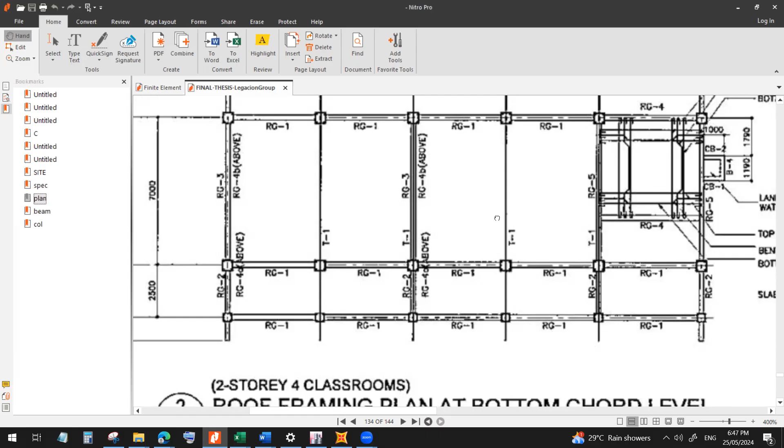Okay, so we will try to model this Tepet school building that I showed you last time in the pushover analysis. Although I have a SAP 2000 model, I'll just show you how to model using SAP, so you'll have an idea.

So for example, the model I made is this one: 1, 2, 3, 4, 5, 6, 4.5. This is our plan view. Okay. 2, 3, 4, 5, 6. Then we set that this is C1, this is C2, and this is C3. So the distances are 4.5. For example, let's just fix it at 4.5, to make it quick. 4.5. Then this is 7 and 2.5.

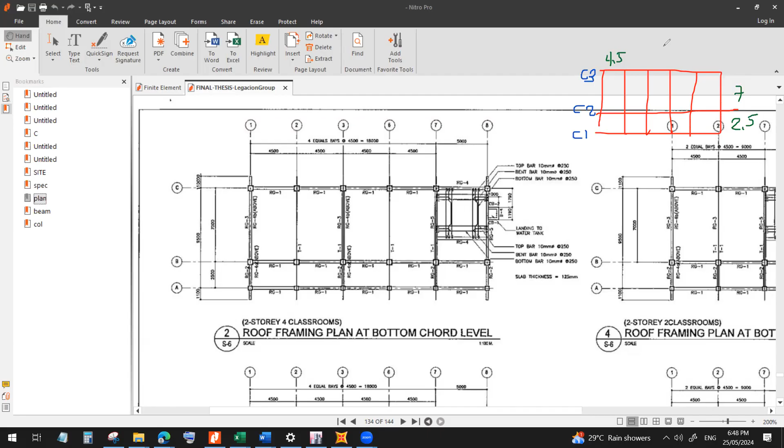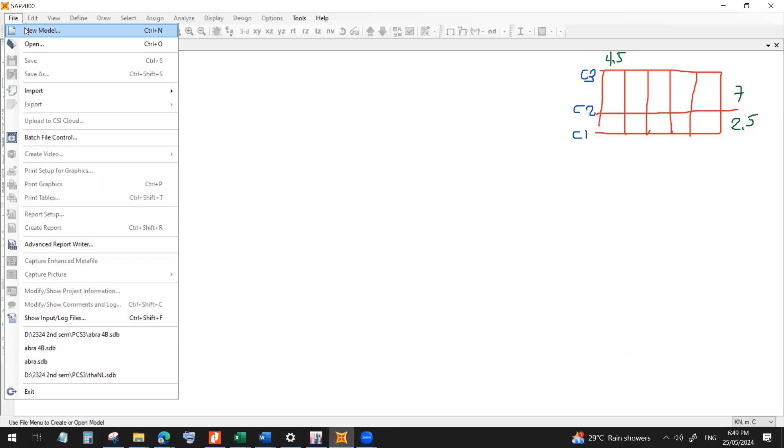Let's go to SAP. And again, make sure the units are consistent. We have kilonewton and meter. Go to file, new model. You can use grid only, to make it quick. It will ask you how many grids in X direction, how many grids in Y, and Z. So this is X, and I think this is Y. In X, we have 1, 2, 3, 4, 5, 6. Then in Y, we have 3. And then Z, since it's only 2-story, just three.

Right? Now, spacing. Let's try 4.5. For Y, let's try 7. We'll edit later on. And then Z, 3. This is for the elevation. Okay, then click OK. Is that right? Remember it's 7. So we'll edit it here.

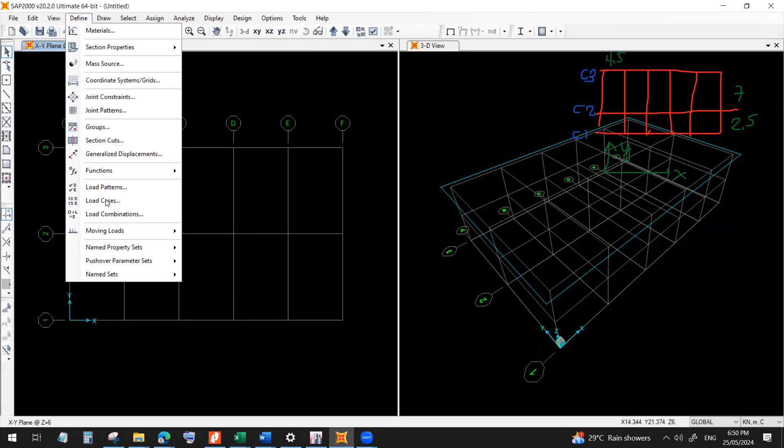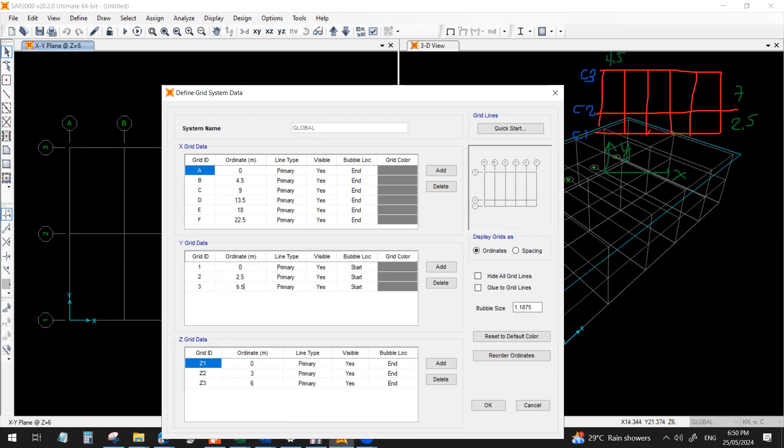Define, coordinate systems and grids. Modify. So grid 1 is 0. Grid 2 will be 2.5. 2.5 plus 7 is 9.5. Then if you want to edit the last one, since the last bay is 5 meters in the actual, you can edit it here. Click OK. Click OK. That's it. Then, as I said, you can just use a single column, single beam.

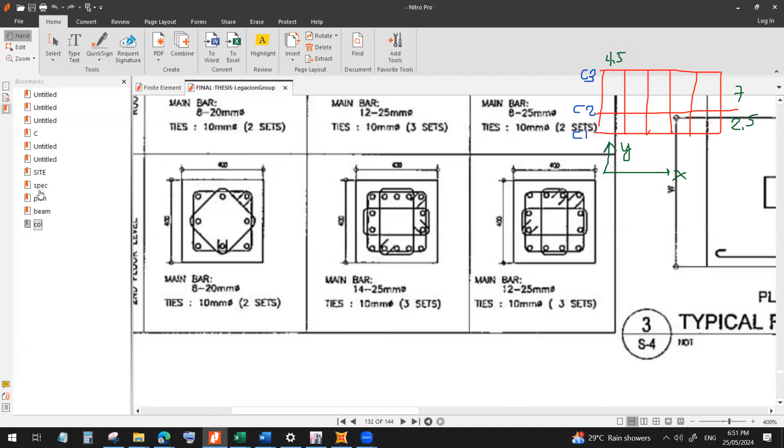Let's model the column. We'll model the 400 by 400, with 14 bars, 25 mm. So, define. Wait, materials first. Because if you look at the specs, the concrete is only 21 megapascal, and the rebar is only 280.

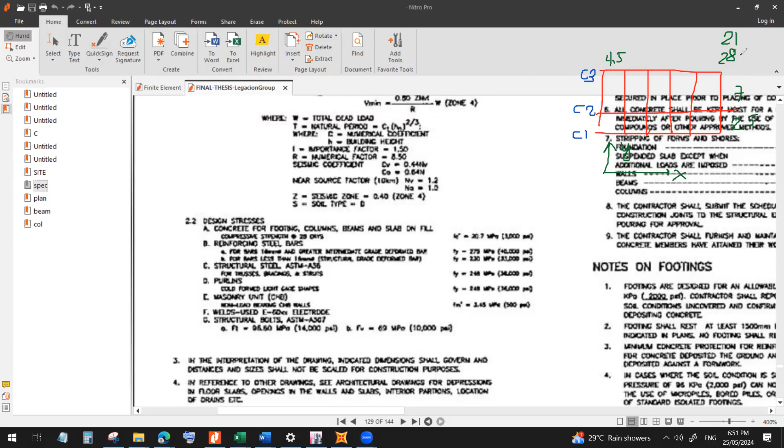Here, add material, concrete. Okay. I'll modify it to the concrete of 21 megapascal. I'll edit it here, because as you can see, it's set at 28 megapascal. So 27,000; let's make it 21,000. Click OK. And next is the rebar.

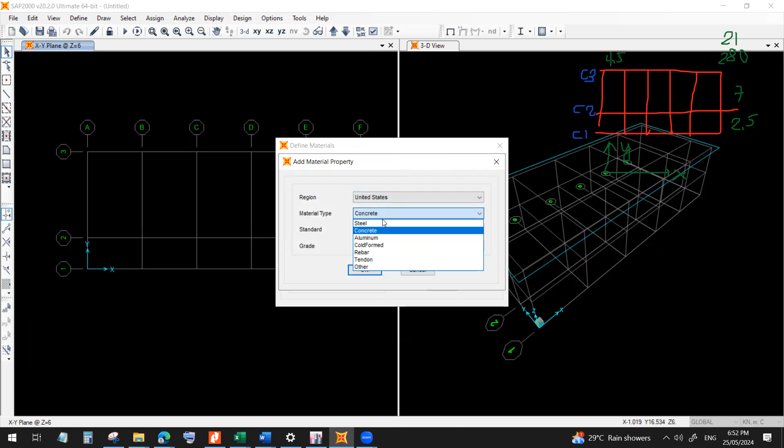Okay, rebar. Let's modify it. It's only grade 40. So expected yield, 280 megapascal, 280,000. Minimum yield, I'll just make it the same. Expected, let's increase it a bit, 300,000, because in actual, it usually exceeds the specification. Okay, then click OK.

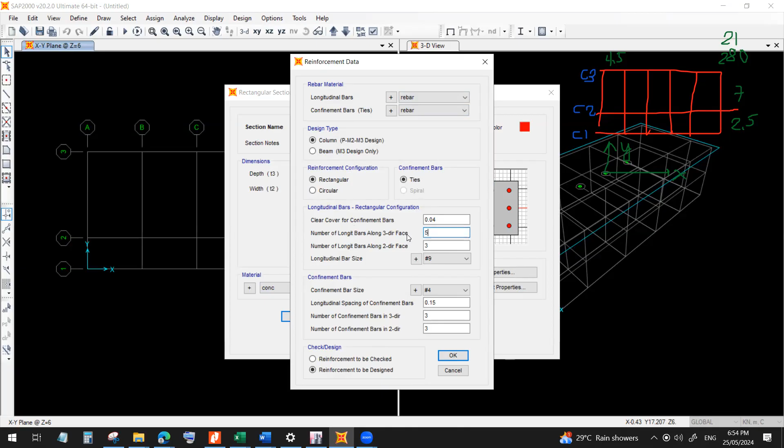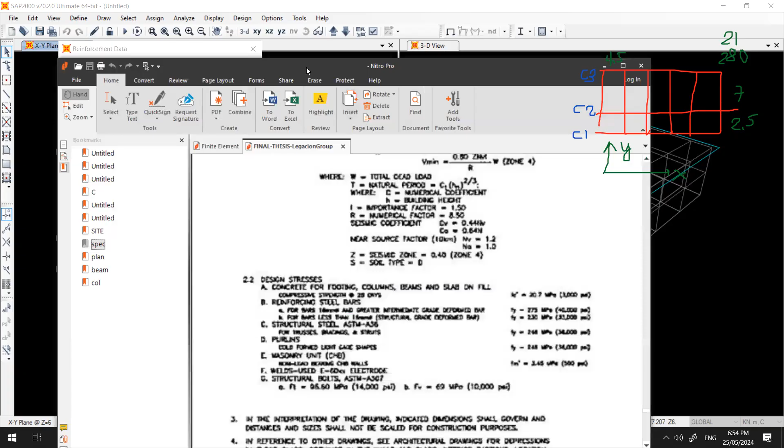Click OK. Then go to define frame sections, section properties, then add new property. Of course it's concrete, rectangular, 0.4 by 0.4, column, and use the concrete we made, and here we define the rebar. Clear cover, that's fine. Number of bars, 5 and 4, I already explained this. Bar size, 25 mm. Then the confinement, 10 diameter. So assuming 0.1. It should be consistent here.

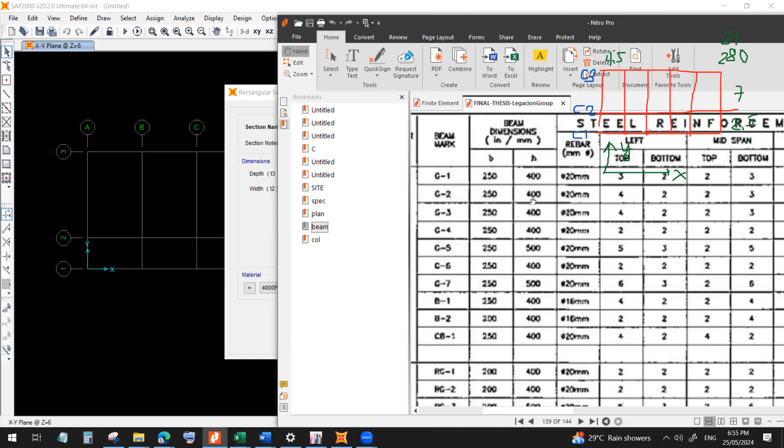5 along the 3 direction, because 3 is Z, its counterpart in Staad. And 2 is Y in Staad. So 5 layers, 4 layers in the 2 direction. Let's click OK. Then OK. Then for the beam property, our beam section is 250 by 400. Concrete reinforcement. Then click beam.

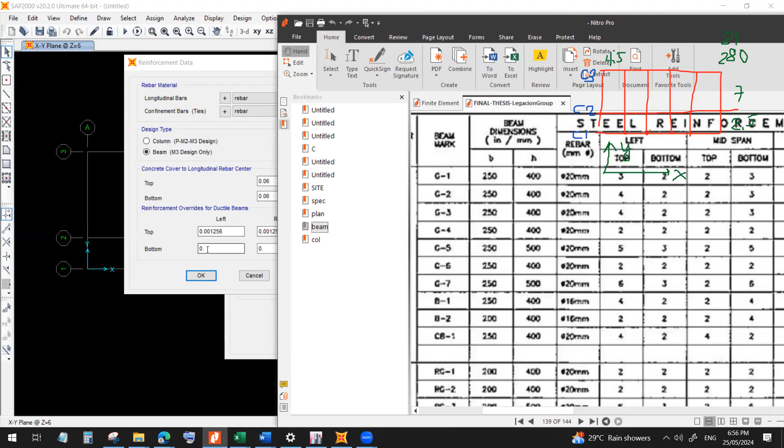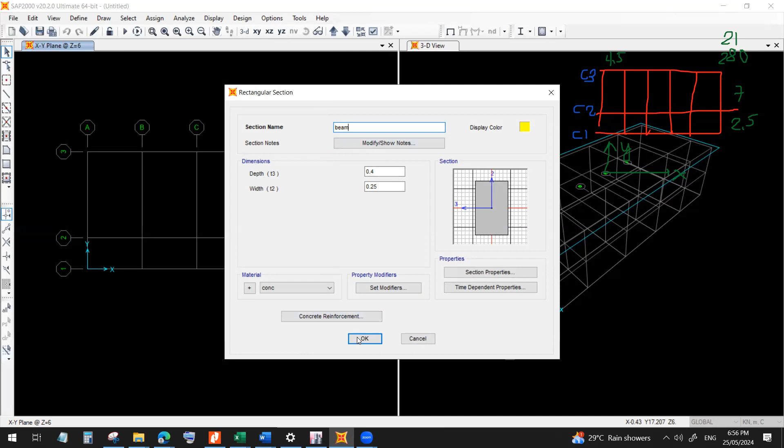Its reinforcement is 4 pieces of 20 mm. When we computed that, that's 1,256 for the top bar. So 0.001256. That's right. Then half, because based on the plans, it's only two 20 mm bars. So that's 0.000, about 628. Then click OK. Oh, no, let's make it a beam. Beam. Okay.

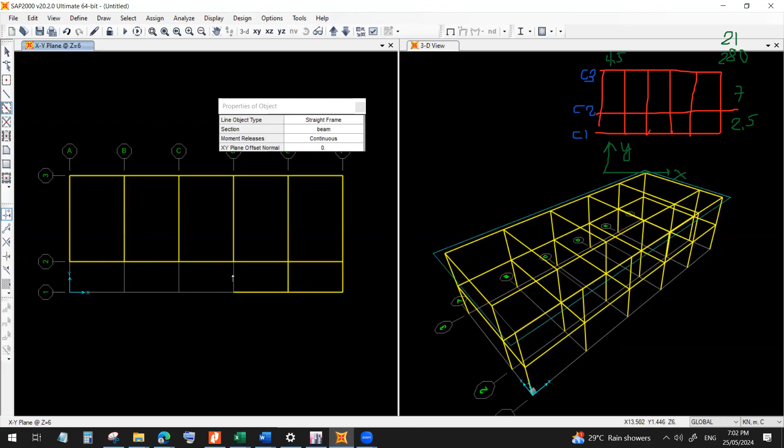Then, you can just click the select mode. 3D view. To get the extrude view, like in a render, we click this. Yeah. So extrude view. This. General options, extrude, apply. Yeah. So, see?

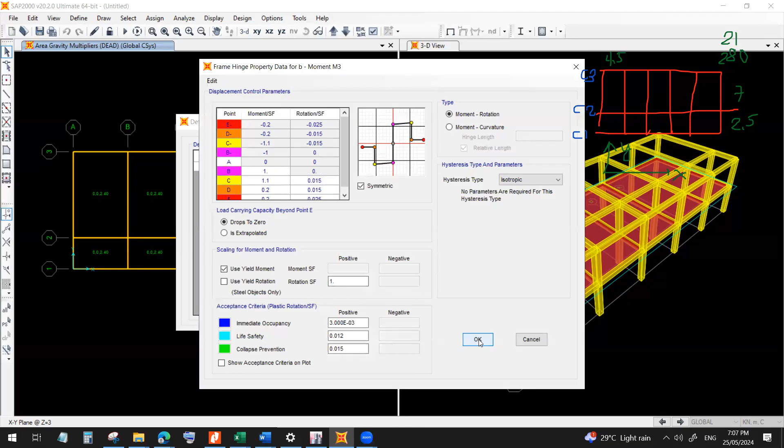Define a hinge first, hinge. Section, hinge properties. So, this is what I told you. So, beam and column. Say, for the beam, I'll choose moment M3. Click OK. Okay. Then, for the column, moment could also work, but interacting is more accurate. For the column, okay. Then, assign the hinge.

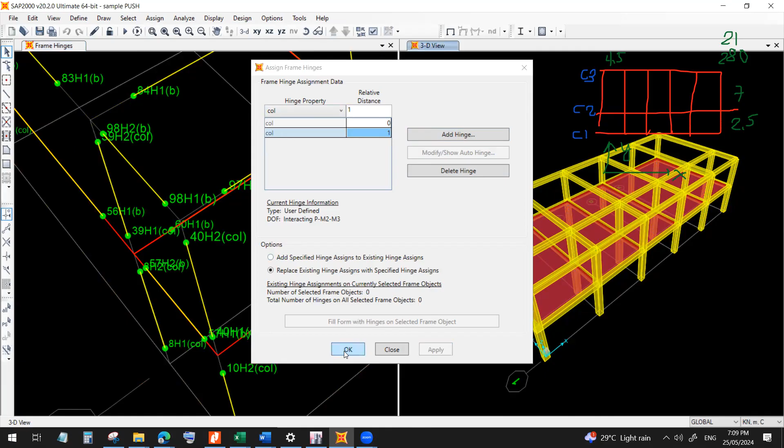Okay, and then define load case. So, we go to pushover. So, push X. Right, just push X. We said this should be nonlinear. Okay. Load pattern, mode 1. Next. Continue from state, then load, then full application, displacement. This can be just 0.15. Joint, is this correct? I'll correct it later. Joint for now. Then okay. Then modify, multiple states. Okay.

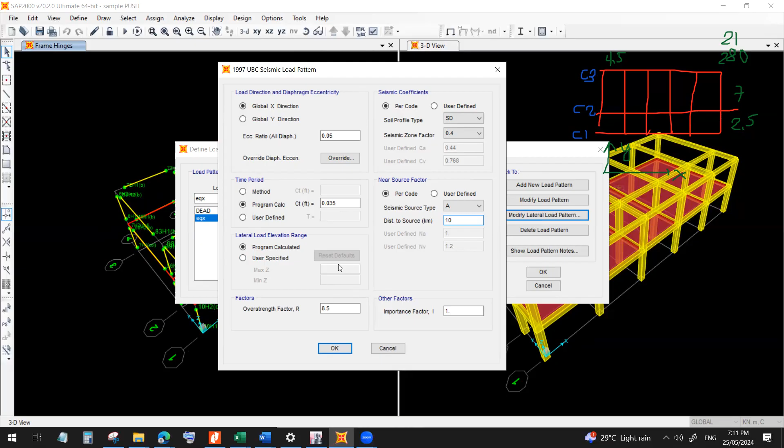Then I'll also define UBC so we have a comparison. UBCX. Define load patterns. EQX. And this should be Quake. And UBC 97. Add new load pattern. Okay, modify. This is where you define the earthquake. Global X, soil type D, zone 4, source type A, distance to source 10 kilometers. Okay, program calculated. Okay.

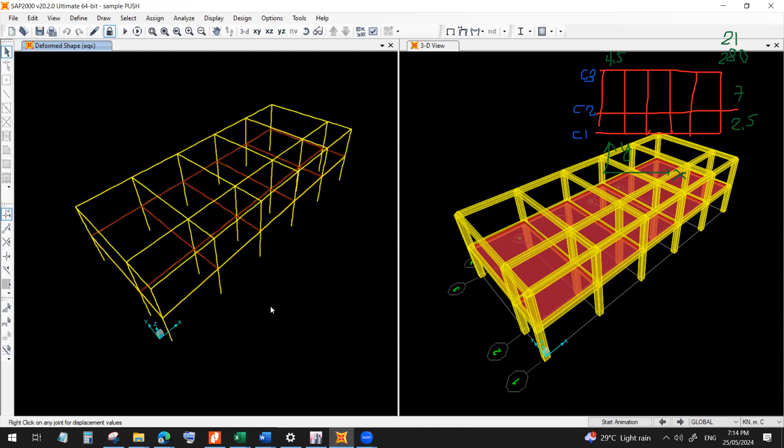Okay. Finalizing na daw siya. Quickly, let's check the deformation. Or kahit yung modal property muna. Modal property. Dapat kasi sa modal pa lang, realistic na. Pag hindi realistic, sabihin may something wrong sa modal. Ayan, kagaya niya, no? Negative 3.6. So, there's something wrong sa modal.

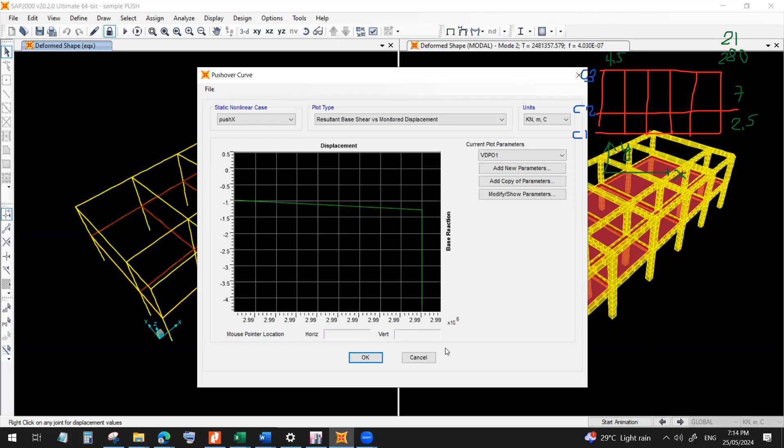Manifest dito sa pushover curve. See. Okay, I'm sorry. May nakalimutan tayong gawin. Siyempre, magiging, if pakita ko sa inyo yung plan details. Merong daw rigid body motion, ill condition. So may problems sa stiffness matrix because hindi ko nalagyan ng support.

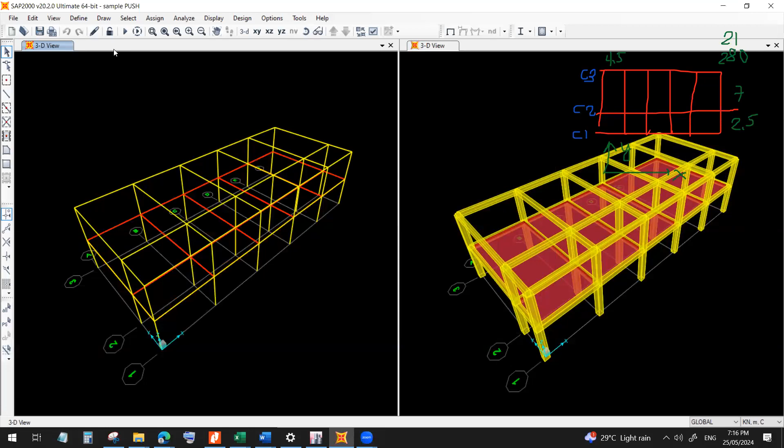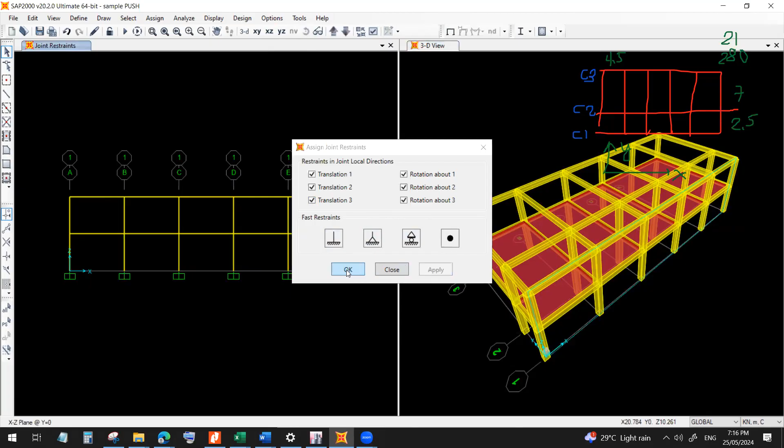So, tayo sa XZ. Lagyan natin ng supports. Here. Assign, joint, restraints. So, fix, apply. So, next. Siyempre, magkakaroon na ng ano yan, singularity. Okay na. So, may ano sila. Hindi ko kasi na-view dito. Obvious naman. Wala siyang support kasi kanina dito. Naka-extrude kasi kaya narito. So, let's try ulit.

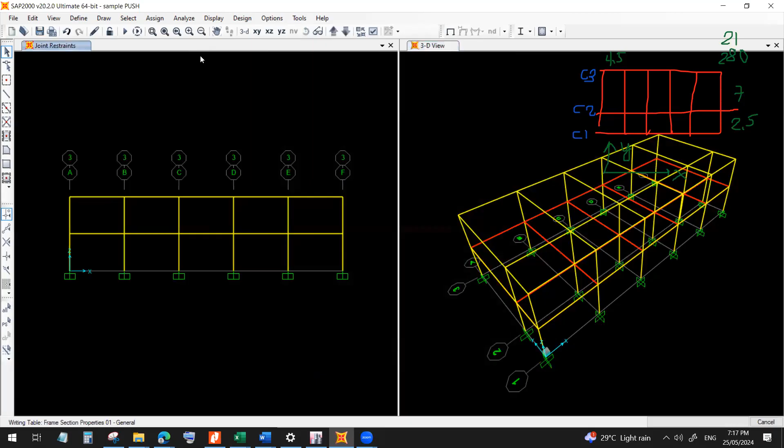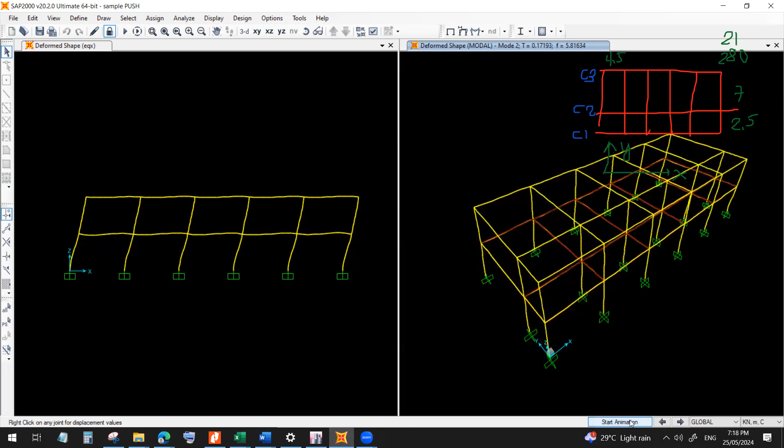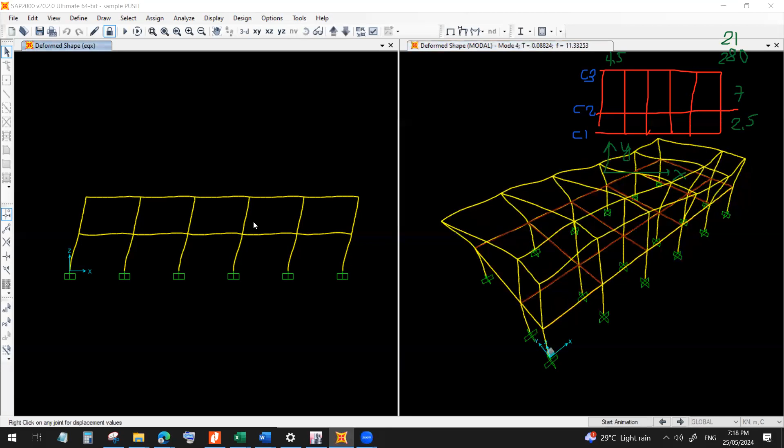Okay, so nasolve na natin earlier yung mode. Realistic na. Now, balikan natin yung mode. Modal, apply, okay. And 3D, yan. And then, i-run ko siya. So, you notice mode 1 pala is in this direction. So, sa Y. Naalala nyo, sa pushover load case, push X yung title ko kanina. And then, sinet ko na mode 1 para sa lecture natin. However, hindi nagtugma. Because ang assumption ko, ang mode 1 is in this direction. Now, mode 1 is in this direction pala. So, kaya pangit yung itsura ng pushover curve earlier.

Kasi, kumbaga, minomonitor natin siya sa U1, which is parallel to X, but ang load pattern natin is mode 1, which is parallel naman sa Y. So, hindi consistent. Okay? So, dapat consistent. So, define load case, and push X, modify.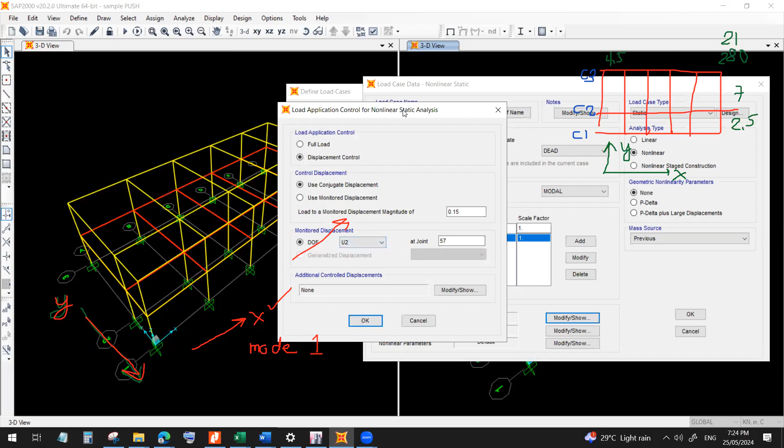So, huwag niyo muna pansinin yung name, ha? So, yan, mode 1 yung load pattern. So, along Y, then yung displacement control, dapat U2. So, consistent yun. Mode 1 yung pattern because mode 1 is along Y, and then yung displacement is U2 because two direction is along Y. So, I should have named this push Y pala. So, para maging consistent naman sa name, push X. Gagawin ko tong U1, kasi U1 is along X direction.

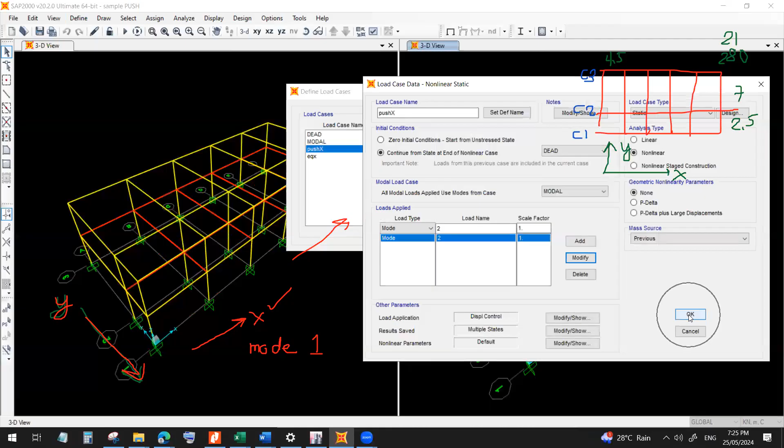Click ko yung OK. But, ipa-pattern ko siya sa mode 2. Modify. Kasi, we have established mode 2 is along X direction. Para maging consistent yung push X. Then click OK. And then run again. Analyze, run analysis. Okay. Ayan, nakita nyo. Ito na yung hinge pattern. Balikan natin si mode 1, which is along Y. So, mode 2 tayo, which is along X na. And then, when you check the pushover curve, ayan. So, okay na siya.

And similar to what we obtained in the lecture, 2,400 yung yield, and max niya is about 3,100. And ito, we call this hinging pattern. Balikan natin sa step 1. Ayan, first hinge is there sa beam. Then second hinge, almost lahat na ng ground floor column. Progress. Then 11, 12, 13, 14. So last step is 14.

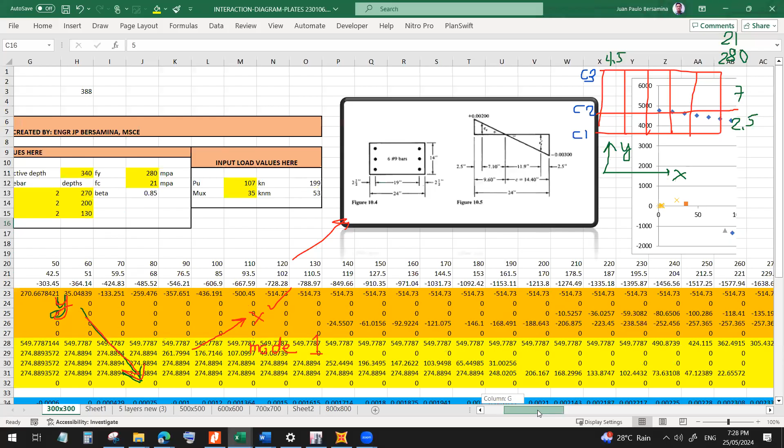Ito yung 400 by 400 na may 5 layers with 21 megapascal and 280 megapascal na rebar. So, 5 layers, hanggang AS4 lang tayo. And ito yung ating pure moment capacity, which is around 250 or 246 kilonewton meter. Nandito sa axis. And double check natin yung hinge ng column.

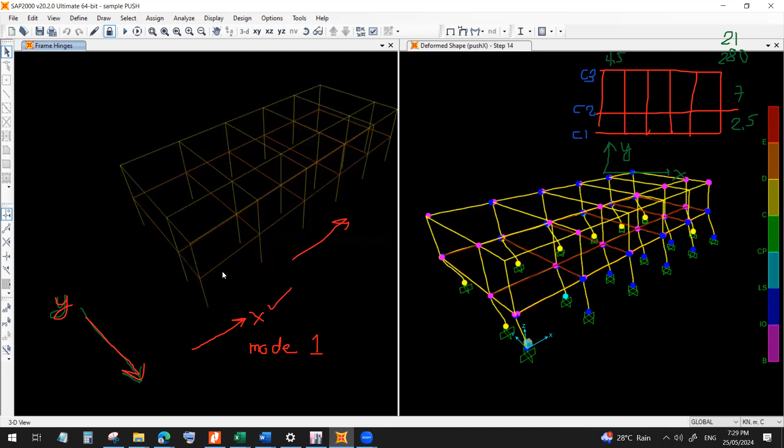8H1, double check natin si 8H1, display show hinge result. 8H1. And then show backbone curve. And as you can see, the capacity is almost the same, 200 kilonewton meter. Makikita nyo na yung sa dilaw, na-reach ng column yung kanyang maximum capacity, which also shows here. So, about 200 while our spreadsheet is getting 250. So, may discrepancy. But at least,

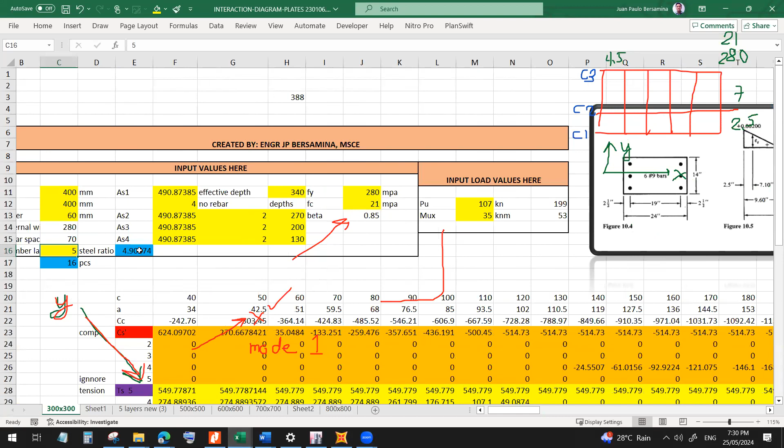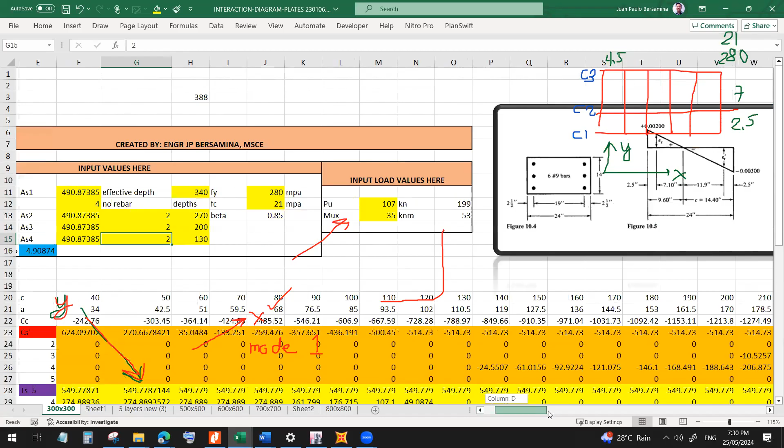using just a spreadsheet, may idea kayo ano yung magiging moment capacity of your section. Okay. I think, check lang saglit.

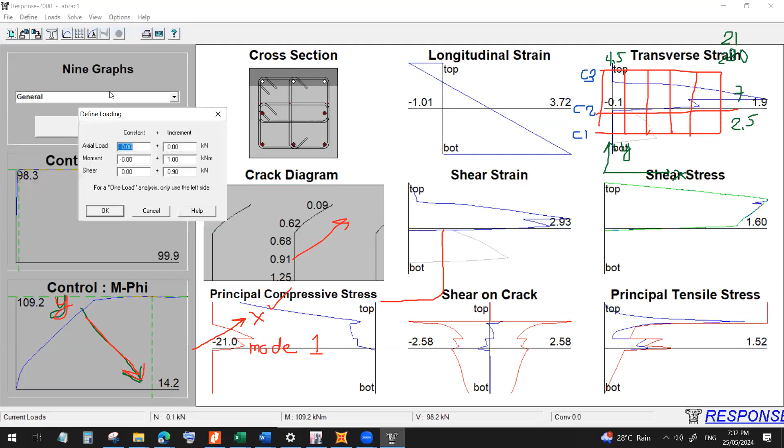Anyway, ito yung sample ng column. Yan. So, solve section of response. Yan naman yung kanyang moment capacity. Zero ko siya. Yeah. Okay, so, which is, as I've shown you during the lecture, which is almost equal here and almost equal here. And that's it.

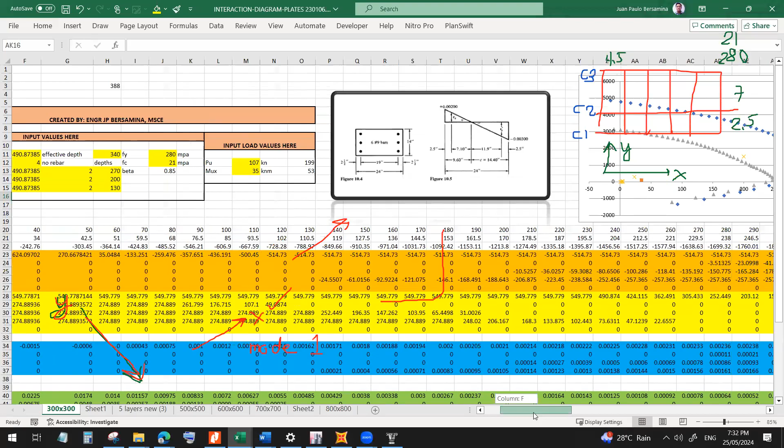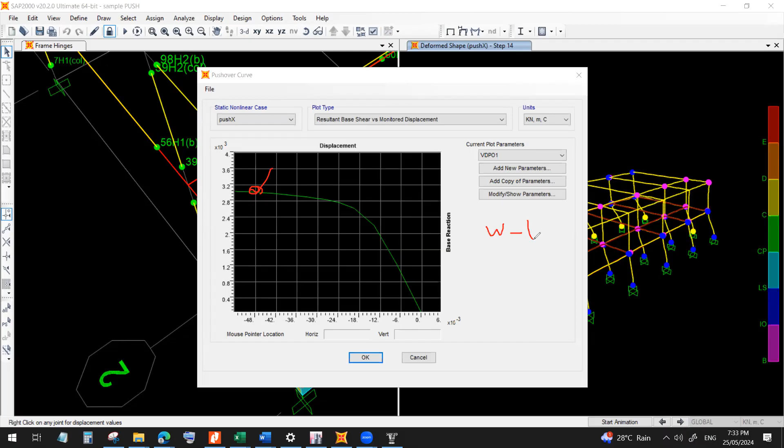And that's it. No? So you will be going to obtain similar capacity using work energy theorem, wherein mag-apply ka ng base shear, no? Mag-assume kayo ng deformation as for simplicity, this is 1 unit and say this is 0.5, no? In your case, kung 5 story kayo, magiging ano yan. So this is 1. So magpakaroon kayo ng ratio proportion dyan. Okay? So say this is 0.8, 0.7, 0.6, something like that.

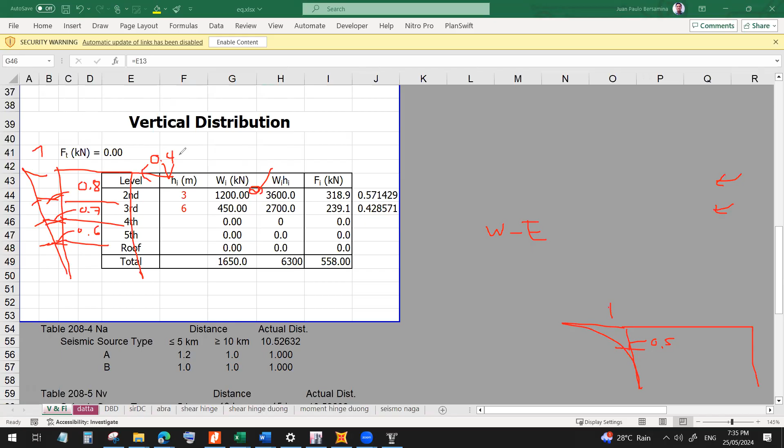And then sa energy naman, that will be 1/6 kasi two-story to times yung moment capacity ng column, number of hinges, plus moment capacity of beam, then number of hinges. Then equate the two, you will get the shear capacity. Okay? Yun lang. Okay, so that's it. No?

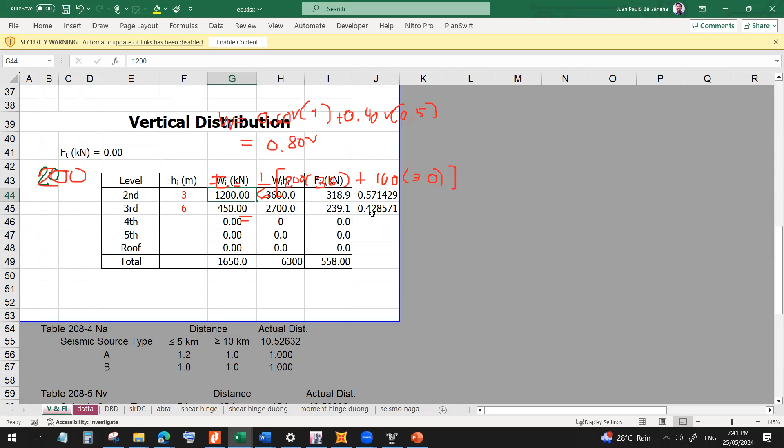So ito yung equation. Work is 0.6V times 1. 0.4, no. 0.6V. Ayan. So 0.6 sa second floor, 0.4 sa roof, no? Yeah. 0.6V sa second floor, so this should be 0.5 plus 0.4 sa roof. So this is 1, yung displacement. So 0.6 times 0.5, 0.3 plus 0.4, so this should be 0.7. Ayan. Then, 1/6 kasi yan yung rotation. Yeah. This is 1, this is 6.

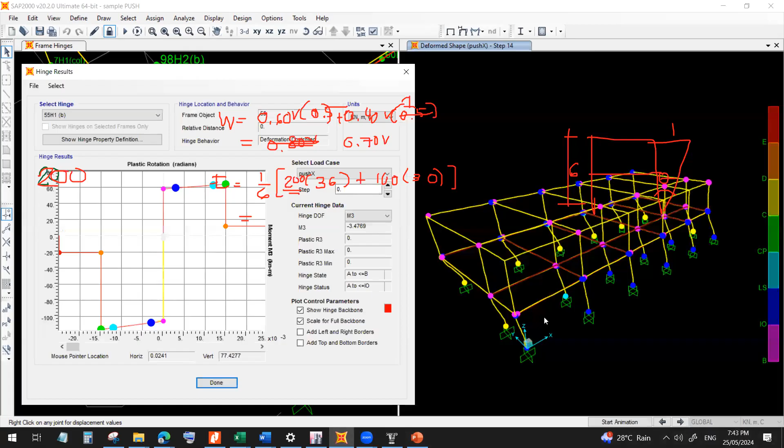And you can double check that sa SAP2000. Yan. 100 times 30 pieces kasi 1, 2, 3, 4, 5 times 3 grids, 15 times 2 joints, 30. And computing that, you will get 1,700. Yeah. So divided by 0.7, I'm getting 2,400. So shear is 1,700 divided by 0.7 is 2,430.

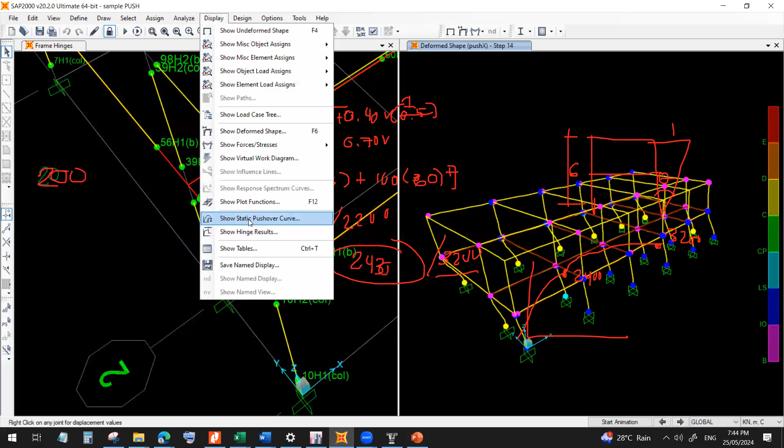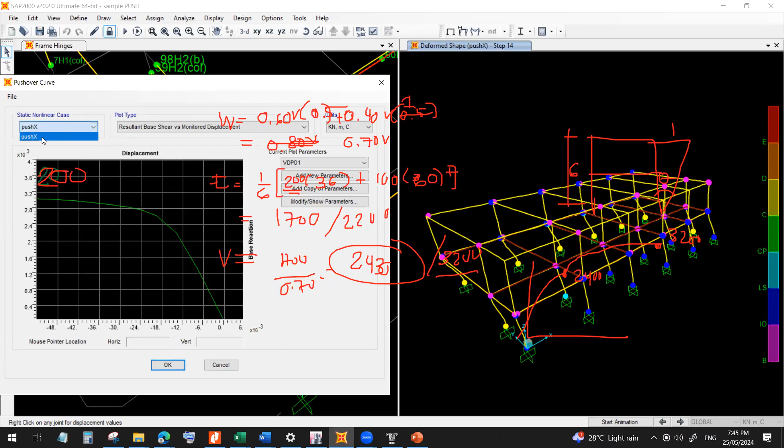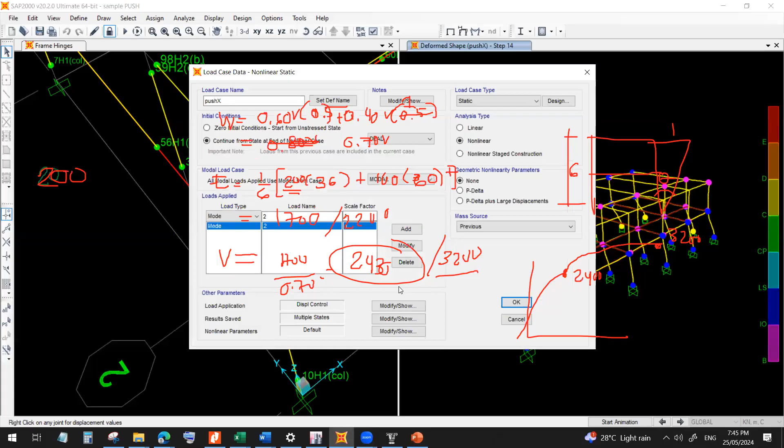So that's the manual procedure, using work energy theorem, wherein work done is equal to the energy stored in the system. So yan, so you can do the pushover along y direction. So again, be consistent. So kung pushover along y, that's mode 2, no? Tapos U2 naman siya dito sa load case, dun sa displacement control, U2 naman siya. Okay, that's it.